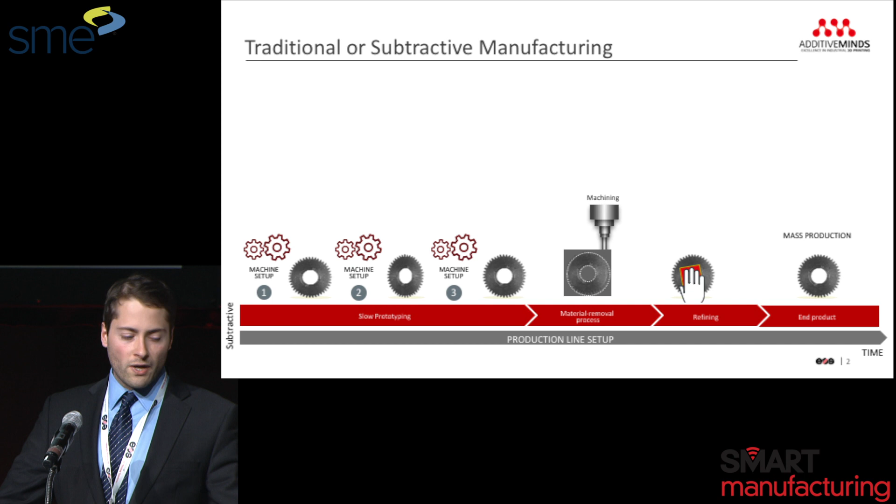So first, just a general overview. I think this is probably background for a lot of people, but traditionally, how parts are made currently in a mass manufacturing environment is a very subtractive method. So a lot of machine time, taking a block of material, machining it down, going back and fixing the dimensional tolerances and things that aren't right the first time. The prototyping and design phase take up a great amount of time and money, and that's where we see the biggest advantage of additive manufacturing: it's straight from design file to print.

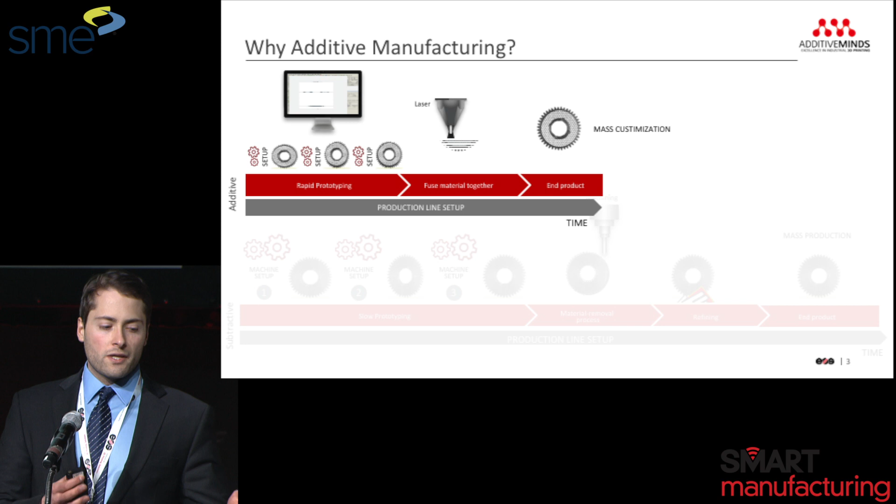This doesn't just speed up the time of producing a part, it greatly speeds up your time of reproducing a part and improving upon it. One of the biggest advantages of our technology is you design a file, you print it, and you edit it once you find out it needs changes. Traditionally, you have to wait for a machine to become available, send the part back, evaluate it, and then remachine it. So really, from conception to perfection is where we see our technology advancing others' business cases.

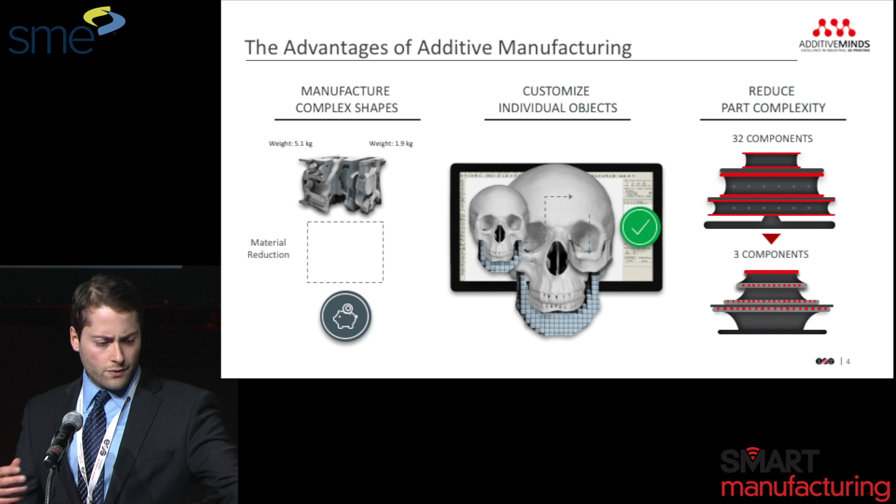Some other features we're able to leverage in our business: we're able to create complex shapes that no one else can. Imagine a part such as what's on the left—there's so many internal geometries, fine turns, sharp angles, things that we can do that you just can't do through machining or casting or anything of that nature.

We can customize individual objects. We can build 70 or 80 different parts, custom for 70 or 80 different people or applications, in one build. In that way, it's really an efficient tool at revitalizing your supply chain, freeing up a lot of machine time and personnel time. The design-to-print and custom-print capability is where we've seen a lot of success integrating into product lines and turning profits.

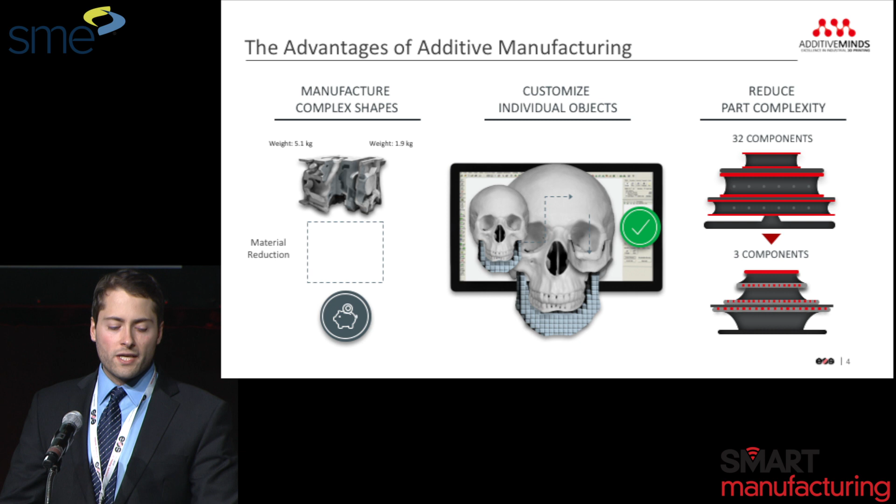Thirdly, reducing part complexity—this doesn't necessarily mean design complexity, because we do have a lot of parts that are very complex from a design standpoint. But imagine something like on the right there: a component made of 32 different parts, all put together, attached and assembled—32 parts that can be mismanufactured, 32 ways it can fail to fit together. By designing these to reduce the components, we can effectively reduce time to production, reduce complexity, and increase the success ratio of our products.

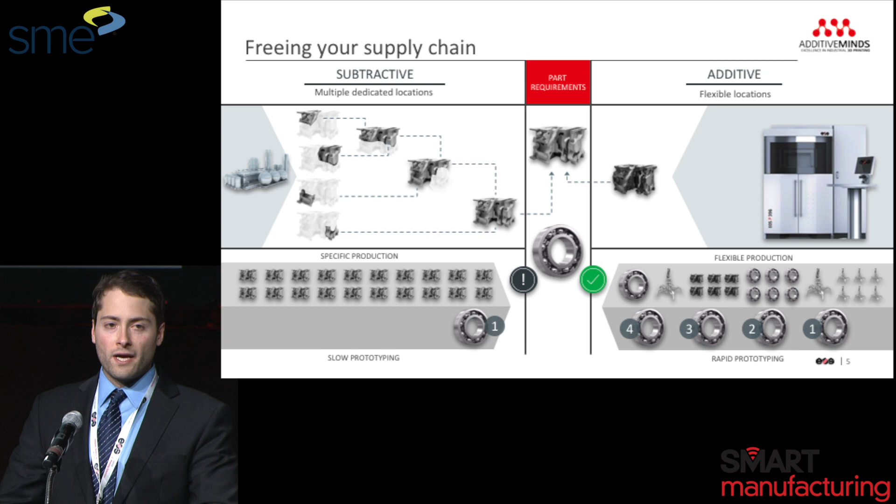Some of the case studies we've done in the past: we've shown that a typical process taking 7 or 8 machine steps across different stations in subtractive manufacturing, we can do in one print. And flexible production means we can do many different parts, as I mentioned, with very fast turnaround in the prototyping phase. We see that as being a major driver for additive manufacturing, currently and in the future.

So we see the ability to produce designs more quickly, validating your designs more quickly, and improving upon them as a major growth factor. It's a way that our customers can leverage our products to give them a competitive advantage in terms of innovation turnaround.

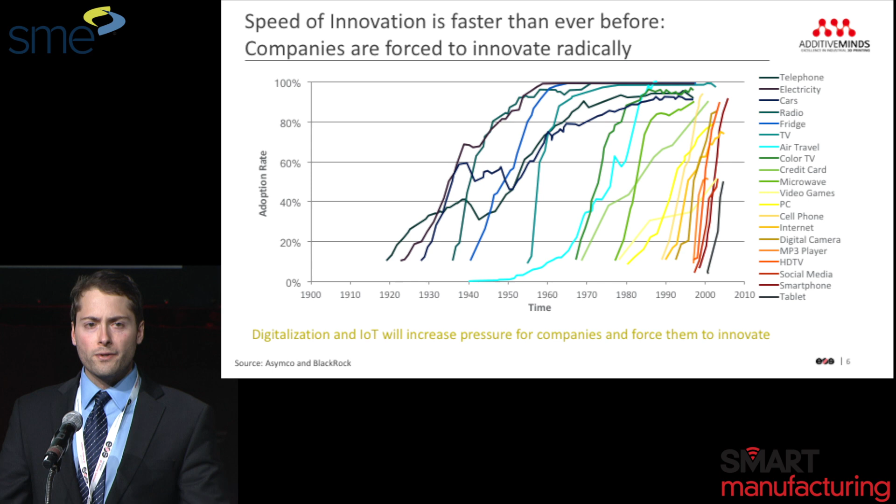I'm going to talk a little bit more about what our Additive Minds group does, but just to overview AM technology - yes, there's a lot of great technology, not just EOS technology, coming on the market, and there's a lot of great things you can do. But one of the most important things, and one of the things not being done in a lot of cases, is transforming our people to know how to leverage this technology.

So what EOS doesn't want to be is just a machine and material producer, just selling our products and never hearing from our customers. We want to help transform the people of our customer base.

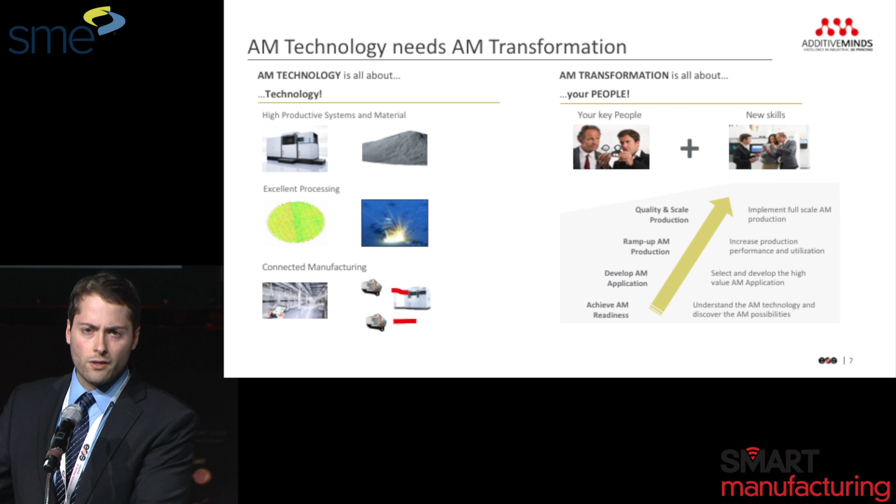We want to be involved in figuring out what parts we can leverage in your current product portfolio, what we can improve upon with our capabilities, how we teach your people to think in a way of being able to utilize this technology, and how we can grow along with you to steer our own technology for our customers.

That is really why we developed this Additive Minds group, in which I am the manager for our polymer Additive Minds. It's a consulting/engineering group where we develop applications directly with our customers, and we teach them how to use our machines on a more detailed and advanced level.

We also have tools that we can help integrate in terms of part screening, selection, and looking at your business model and leveraging our products to improve upon your business. So breaking it down, there's really kind of 3 stages of customers right now.

We see a lot of initial customers that don't have a lot of experience in additive manufacturing. So how we really get involved with them at an early stage is we build benchmark parts with them. We help them tweak their designs, their material, or their products, and we show the viability of our technology, and we train them on how to do this themselves.

Another goal we have right now is not to just be short-term suppliers, but building partnerships. We're a very customer-facing and customer-focused company looking for long-term partnerships - how do we build sustainable relationships to drive our technology forward in a global sense.

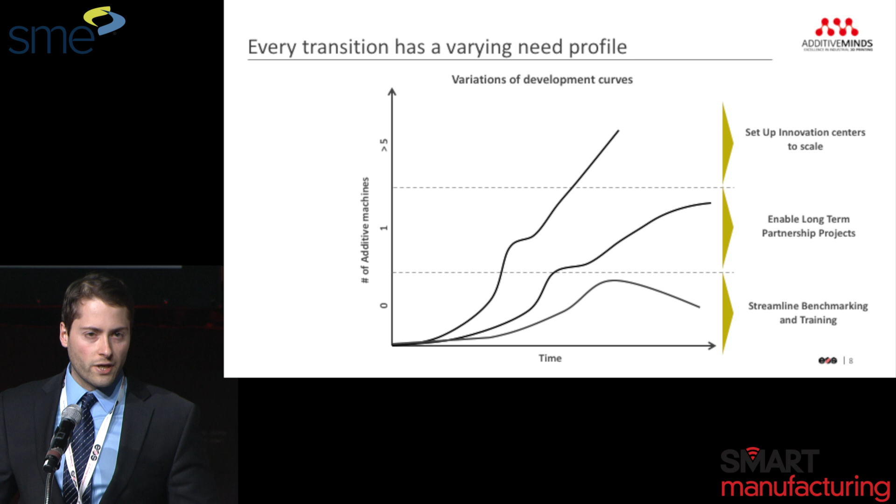We're also, with select customers, building innovation centers where we're setting up 5 to 10 machines, on site with our customers and partners, and then we're using those to rapidly revitalize their business and transform it to move into the advanced additive manufacturing phase.

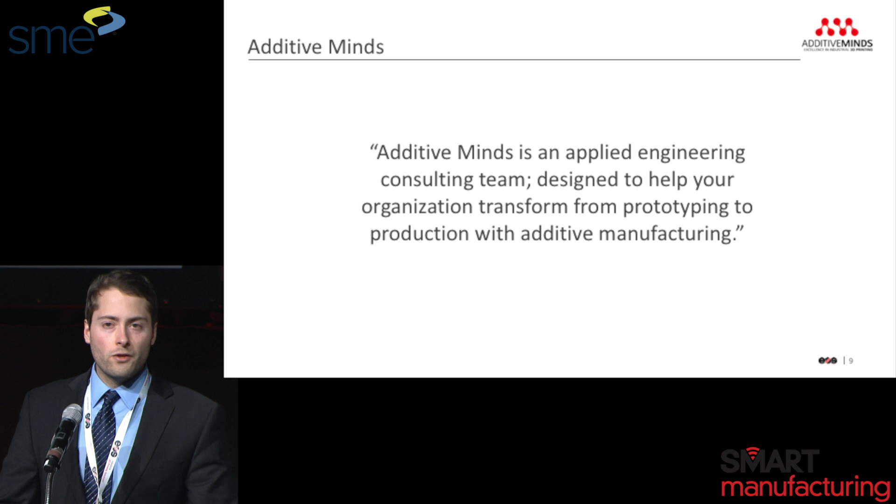So just an overview of what we do - we're a consulting team designed to help your organization transform, and it's really about us not being a supplier. It's about us being a solution provider and a partner to our customers and to those wanting to leverage our technology, and vice versa.

So what I wanted to do is just give a brief overview of each of the areas we operate in, to give you a better idea of how we engage our customers and the products we offer.

So just to talk a little bit about our training portfolio, there's a large range of general to advanced training products that we offer. Innovation with 3D printing is a module that we offer to beginning customers on what is 3D printing, what are the advantages, and the way we can utilize it in your business.

Then we offer a design for additive manufacturing course, which gets a little bit deeper into the allowables of designing an additively manufactured part - what can you do, what can't you do, and how do you design it for your specific application?

In this module, we would take a specific part file from our customer, spend a couple days with them, and redesign it to show how we can optimize it for their application. We have other consulting or training packages such as topology optimization and exposure editing.

A lot of our customers want to design their own materials and their own products, so we teach them how to leverage our machines with their own products if that's what they want to do. We really are trying to offer a diverse portfolio of trainings targeted at all levels of users, helping to grow our customers with us through this process from basic to advanced.

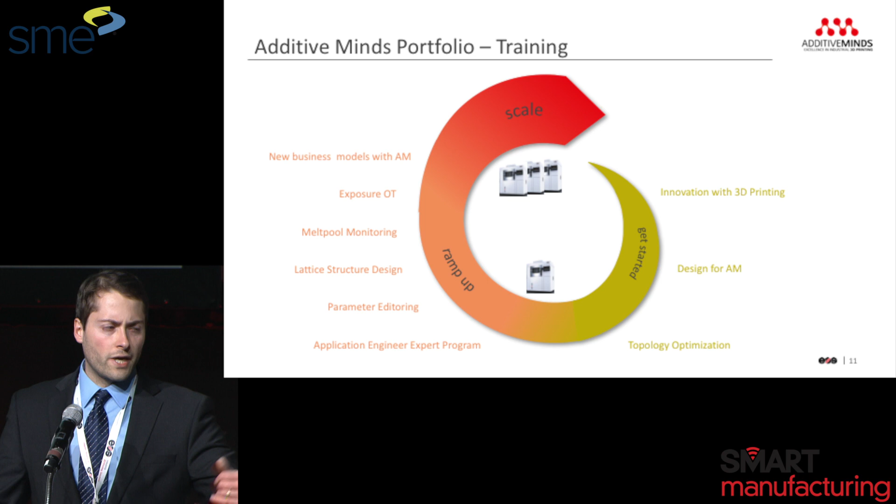So I just wanted to go into a couple of our more popular trainings that we offer.

Innovation with 3D printing really looks at two main areas: the complexity and flexibility of additive, and how we balance that in our product portfolio. We look at where complex geometries, customization, and functional integration collide to allow us to design a product that can't be produced any other way, and can help replace or improve current products.

The other way is looking at flexible production time, location, and volume. Often we find that especially our heavier manufacturing customers have one large plant in one area, and it makes it difficult to diversify their supply chain and the way they make parts. One advantage we see is that it's a machine with some equipment, and if you have a room large enough, you can put it there, and we can work with you to create these sites around the globe or at your locations. So the flexibility of your supply chain goes up greatly, and you reduce the risk of having just one large supply or production site.

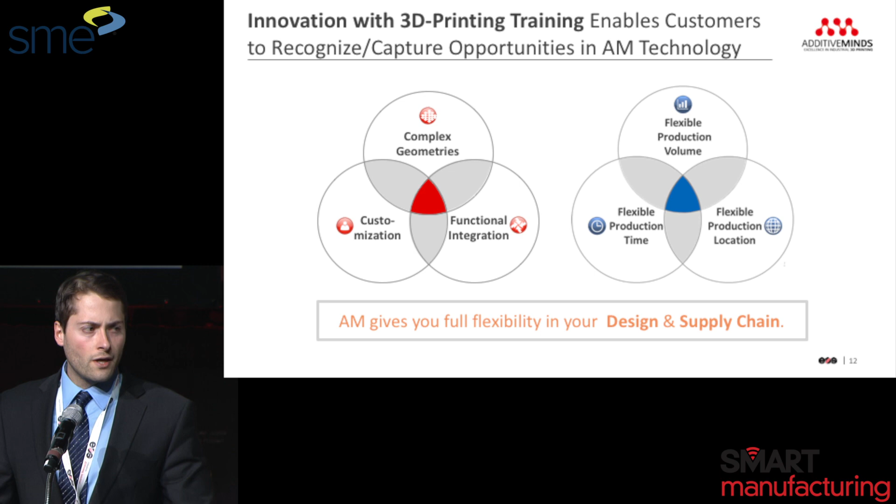Generally, how our trainings are conducted is we lead small groups custom to the needs of your people, and we do it on site at your facility or at our facility. So it's really very customized to the needs of our customers.

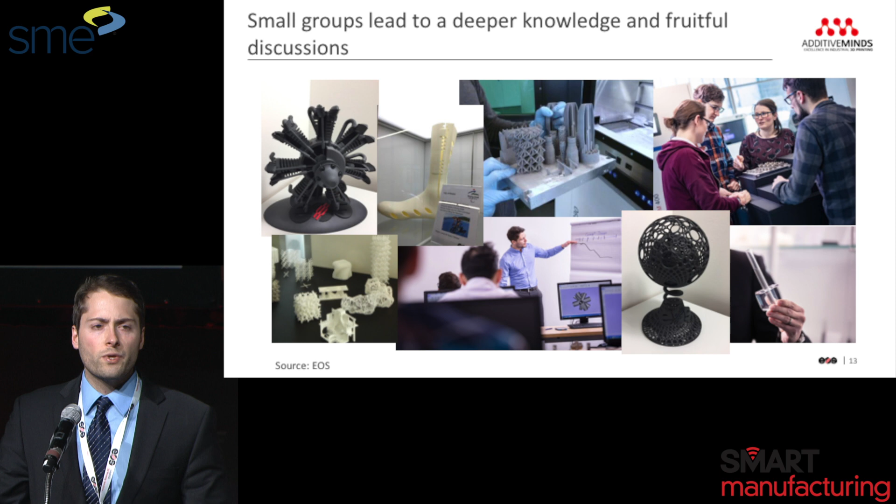If there's a machine installed at our customer site, we'll go and do the training there, or we have a showroom in large centers in Texas and Michigan where we host training events that our partners and customers can come to, and we work with them on bringing them up to speed on how best to use this technology.

So learning outcomes of this basic training is to be able to identify and understand the benefits of AM, and become a thought leader within your company. If you have a large company and you train a core few members from beginning to finish on how to utilize this technology, it can infiltrate the rest of your company, and you can use that to advance your company through our specialized trainings.

Maybe it doesn't make sense to train everyone in your company, but if you have a tight group that we can bring to our site or train on site and bring them up to expert status, we can drive your products that way too. We find that this unleashes creativity and innovation throughout our manufacturing platforms.

This is a 1 to 3 day course depending on what our customers need, and we offer it with a max of about 10 participants. This is also available in metal and polymer additive.

There are very different requirements from a design side. One easy example is our metals require support structures, and our polymer technologies don't. So you have a lot more freedom when printing a laser sintered polymer part—more design freedom and more ways to pack your parts in a build than you do with a metal machine.

We also leave our customers with all of the material that we bring, so handouts and things like that, but also the test parts and the parts that we co-developed during the process. We find that if we work through the entire process from beginning to production with our customers, they tend to retain that knowledge a lot more, having been through the whole process.

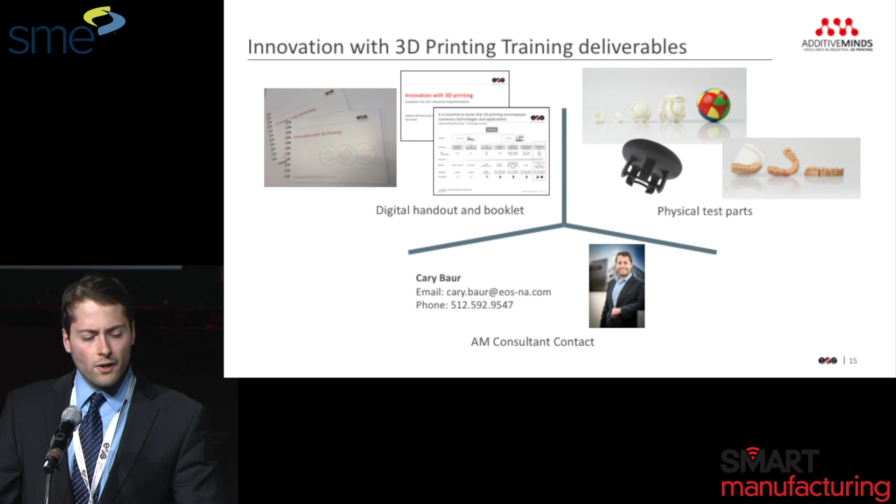The second topic I wanted to talk about is our AM design training. We have a training module specifically designed for how you design a part for an additive manufacturing technology, whether that's metal or polymer—what to avoid in terms of part orientation, surface roughness, thermal warpage, and things like that. We offer an advanced class on how to design parts and how to orient parts in your systems.

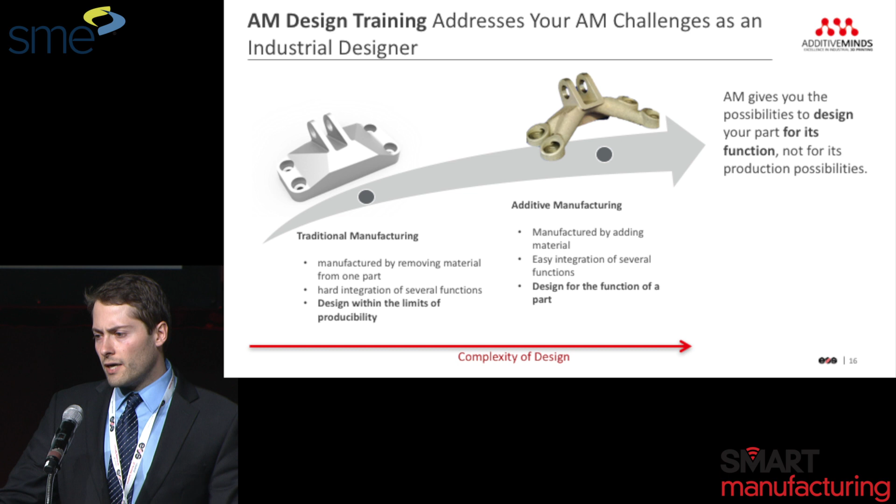This really gives you the ability to design your part for its function. It's a way to give you a tool to design specifically for your application, and teaching your people how to do this on their own.

The outcomes of this are to understand additive manufacturing compared to traditional, and learn and apply these technical guidelines. We first teach the guidelines of how you orient a part, how you design a part, and then we teach and watch our customers do that with us.

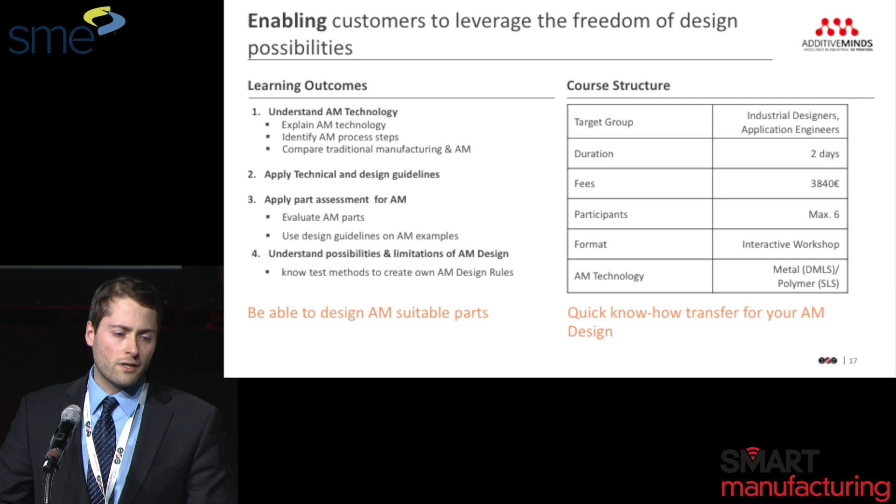This actually offers a big advantage for us too, because when you are interacting on this level in a training or consulting capacity, we're learning a lot too about your business case and what you need. That goes into our roadmap for our technology too. It's really important to be interacting with your customers at all levels, at all times, to really drive what we hope is a very customer-faced and customer-focused technology.

Similarly, design is a bit more advanced, but we'll work with you to design parts such as these. You can see the octopus at our table over there, and kind of ensure that all of the AM design guidelines are understood, and develop additive guidelines for our customers' processes also. A lot of these guidelines we develop on site when we're learning with the customer what their products are.

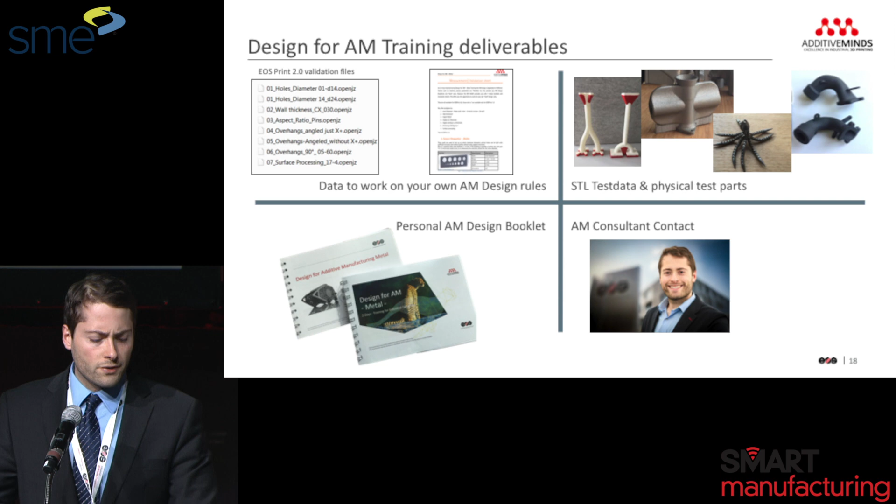So that was a little bit about our advanced training. There's a lot more to talk about there, but I didn't want to go into too much of it. So I want to jump a little bit to what we do in terms of consulting with our customers.

Our consulting group is something I think really sets us apart from other producers and machine and material producers, in that we specifically design our consulting packages around what your needs are. I'm going to go a little bit into how we teach part screening and selection for these consulting packages, but I just want to point out that we develop these specifically with our customers.

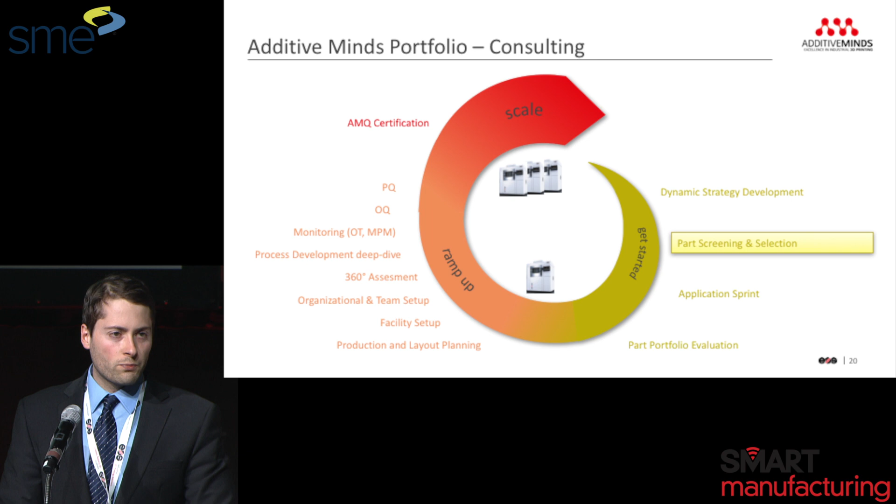These aren't really going over pre-made courses that have been the same for years and years. No, it's our experts in the room with your people for a few days, working on your real problems and working on how to advance your technology.

We find that one of the biggest challenges with dealing with our customers is, okay, they understand our technology, they understand that additive manufacturing is on the rise and all of that, general stuff, but one of the hardest questions to answer is, where do I start with my portfolio?

Maybe I'm a manufacturer that makes 500 parts. Hey, we could technically make all 500 of these parts potentially with additive, but how do you really go about deciding what makes the most sense for your business, at what to put into additive?

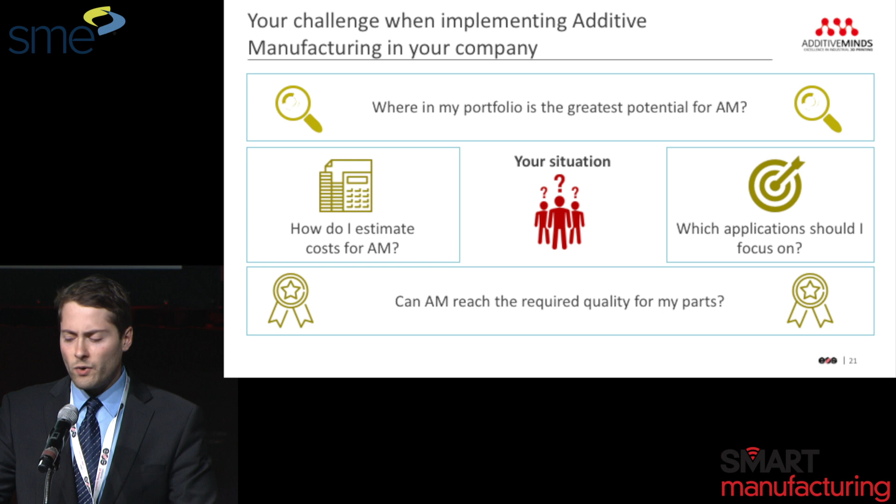So I think a lot of things come into that: how hard is it to redesign? How effectively can you redesign that? What is the cost estimate with AM? A lot of those questions can be answered by the way we design our modules, and we work with your people to go through our tools to do those calculations and do that part screening work so that we can together go forward and say, yeah, this makes sense to build, this maybe doesn't, and we'll look at it at a different time.

The way we kind of look at this is there's always an added cost to additive, designing new or bringing in new machines, new materials, things like that. It's always kind of a startup cost. So you're in a little bit of a deficit if you just look at the cost to bring that technology there. But if you break it up into ways that you can leverage that to create net value, you start to see a better picture.

Cost reduction through supply chain, freeing up your supply chain, making it more flexible, more agile, things like that. Maintenance of fewer machines compared to a traditional way of producing these things. Time reduction, again with the supply chain, prototyping, rapid development of products and new designs, and the additional value, which you could see if you look at the life cycle costs.

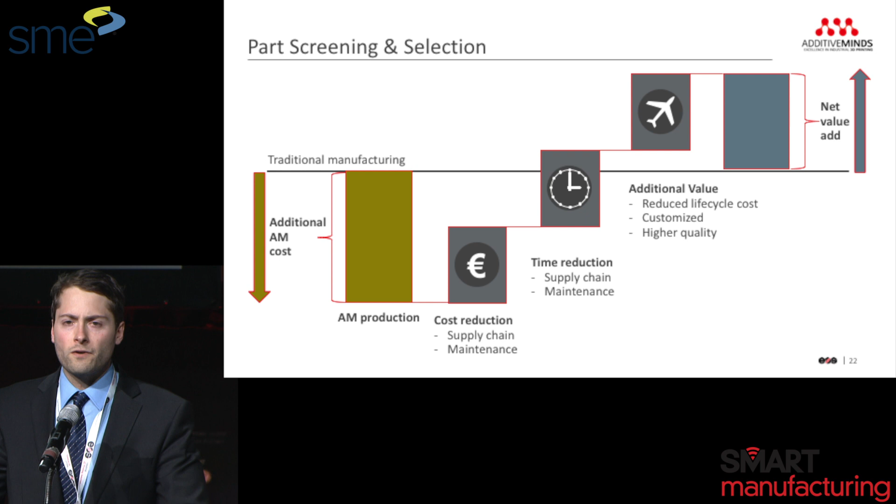If you look at the ability to go from concept to product and speed that up, that results in not only a better product, but also a much faster product with a lot more market potential and adoption. It's really a business win when you look at it, if you're able to stay ahead of the curve and go from conception to product in a very short time.

So when we're looking at part selection, going back to my other example, let's say you have 500 parts and you're looking at what you want to use this technology for. Does it make sense to bring in a new printer for building this part? The way we like to look at it is there's a quadrant box of does it technically fit within additive technology, and what is the economic fit? What are my economic advantages of using this technology, and what is the technical fit in terms of can we produce it well, can we produce it consistently, things like that.

To evaluate the technical fit of an application, we simply walk our customers through: does it fit into your current AM system or systems? Do we have the products that can help redesign and actually produce these materials and parts on our systems? Are there materials available? Do we have the right solution for you? Does it fulfill AM design rules?

Going back to our design training that I was talking about before, a lot of parts, frankly, are very basic parts that don't need additive manufacturing. So it's also a thing of being smart. We don't think we're going to solve the whole world's manufacturing problems, or that we're going to take 100% of everyone's manufacturing. We want to be in that niche area that drives value for our customers.

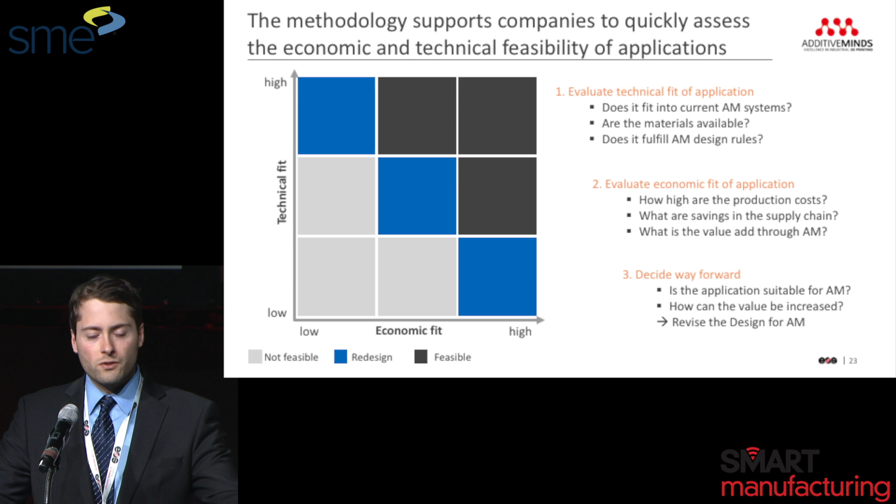This is a tool we like to use when we're looking at new designs and new products, that keeps us focused on not just using additive for the sake of using additive, a technology we've heard a lot about and people seem to be adopting, but how we can sit down and look through our products methodically and think: here's how we can partner with EOS, here's how EOS can partner with you, and use these tools to determine together whether it makes sense for your product line to adopt this technology.

During these types of workshops, which we like to hold at our customers' sites or at our own sites with training facilities, it's very interactive. We have specialized consultants, either metal, polymer, or design consultants, who can brainstorm interactively with your engineers and people to say, okay, yeah, this makes sense, or no, it doesn't make sense. That interactive discussion leads to a fruitful result where we not only determine what parts make sense, but build knowledge of the methodology of how to look at this from both points of view, yours and ours, looking at it from a realistic manufacturing view and also from an additive cost and capability viewpoint.

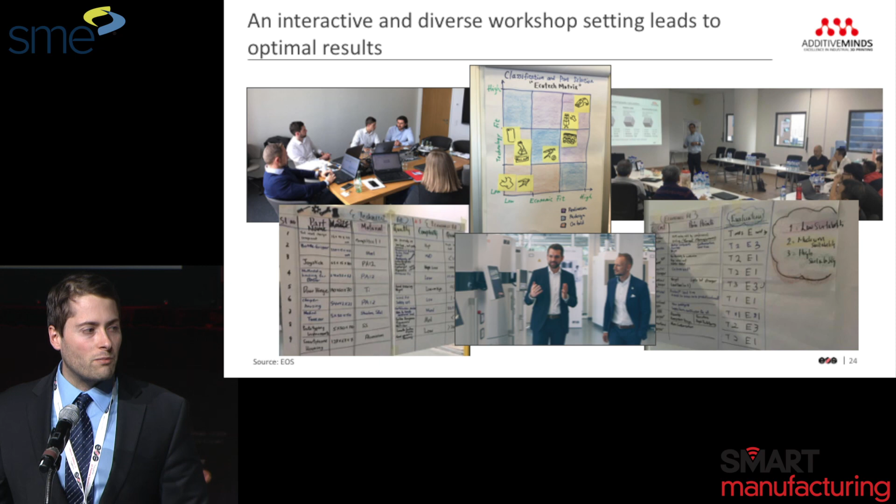So the desired learning outcomes of this are to understand the possibilities and limitations of AM, once we work with your folks to make sure that the technology fundamentals are understood.

We look at case studies from industries, things from our past where we've said, okay, the part you're looking at, we've done something similar before. It could have worked out, but the costs weren't right because it took too long for a certain reason. We can look through that and work with you on it.

And we teach the part screening methodology. This is something we want you to walk away knowing, that your people have a knowledge of how to do this and how to utilize the tools we've developed. And we're always on hand with our customers to help solve these problems together.

I think the next step is applying these methodologies to your portfolio, evaluating the design and redesign, and integrating into your product line. It starts with understanding the technology, understanding your portfolio and how to drive that forward with EOS technology, and understanding how to redesign specifically for this production method.

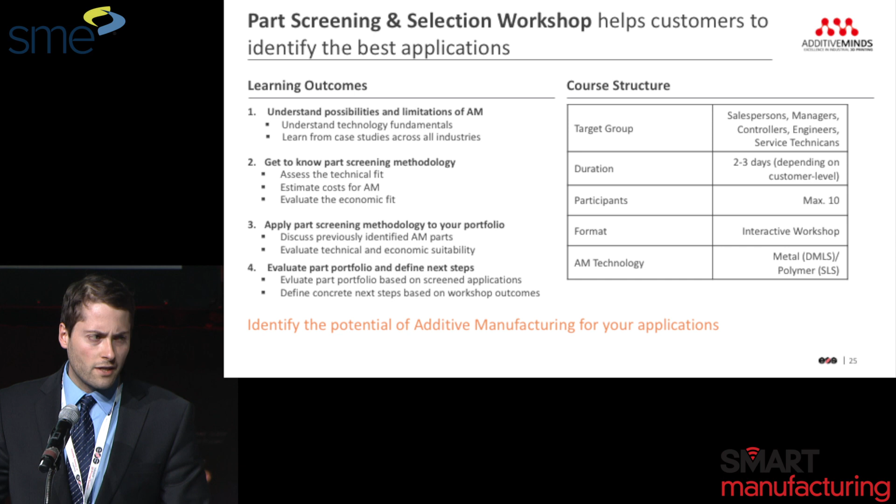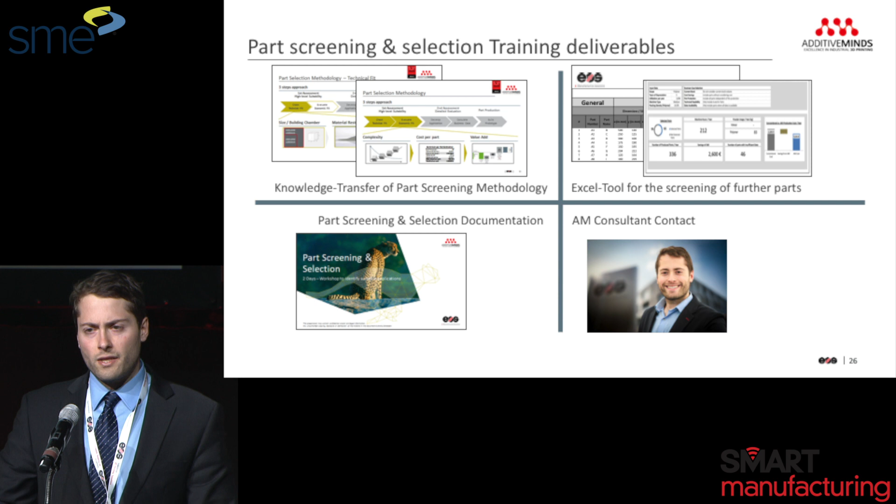So again, going over the deliverables, we have tools that we give to our customers: cost calculation, screening detail tools, tools that help you understand the difficulties and advantages of using this technology. The last point I want to touch on is innovation centers.

Just want to go over a couple we've set up with our partners. In Germany right now, we've brought Audi through this process of introducing the concept of additive, teaching them how to use additive, consulting with them on what products they can use to customize, to make it make sense economically for additive manufacturing.

Their objectives in coming to us were to move prototyping to industrial application, integrate additive capabilities with tool development and tool making, really driving customer-focused custom parts. They were looking at production of inserts for die casting molds.

One of their projects involved dashboard components, how a user might want to put his name on his car dashboard. We can use our tools to produce a die that allows them to customize parts of their dashboard and things like this.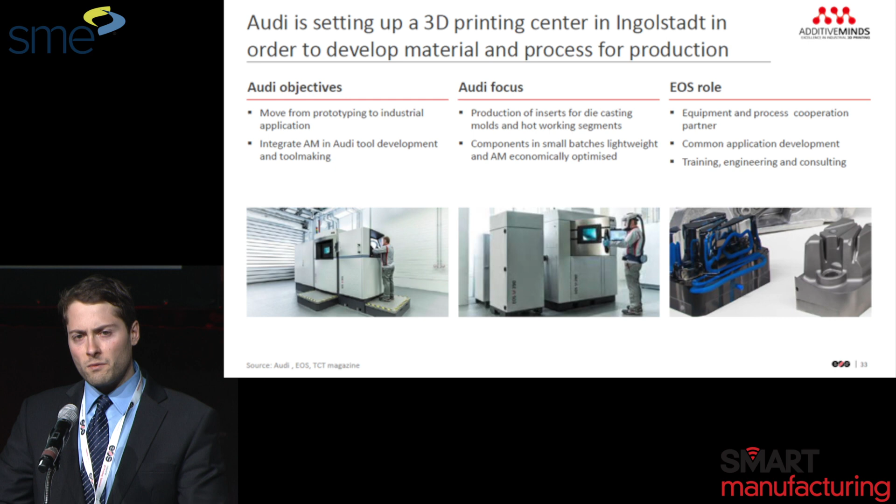Our role in this is supplying the equipment and process, of course, but also teaching them, training them, consulting with them on here's what we can offer, here's how it fits into your portfolio, here's how it doesn't, here's the economics of our materials, our machines, upkeep, all of that, and driving that together with them.

I show this example because it's an ideal example for us of leveraging our Additive Minds team to not just sell a typical customer a machine or a material, but a joint learning and joint partnership where we've learned a lot from this and they've grown a lot too. This is a really fruitful relationship that is continuing to advance both of our business cases as we move forward.

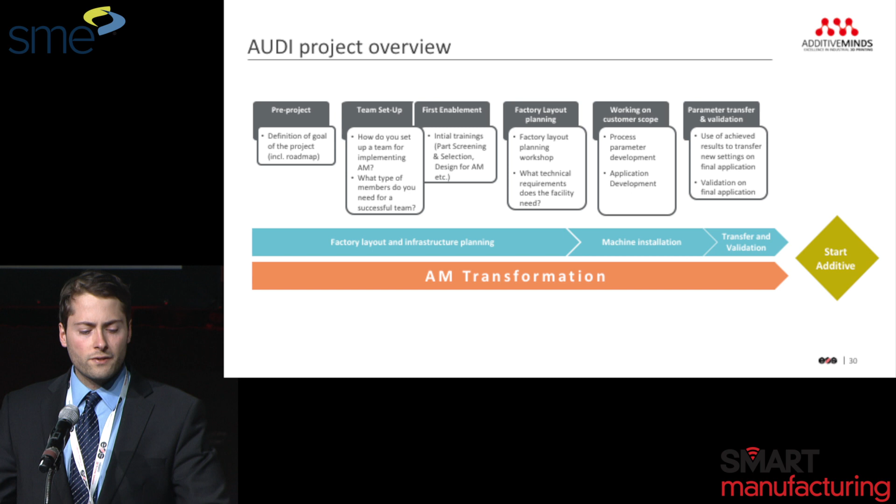We've set this up from pre-project, we've set up the teams first for enablement. We're now in the factory layout planning and working on customer scope projects, and we're driving this forward together as partners, through our Additive Minds group.

The last slide I have is UDRI, also another partner of ours that we've set up an innovation center with. Their goals were really more on building parts that are certified for certain processes.

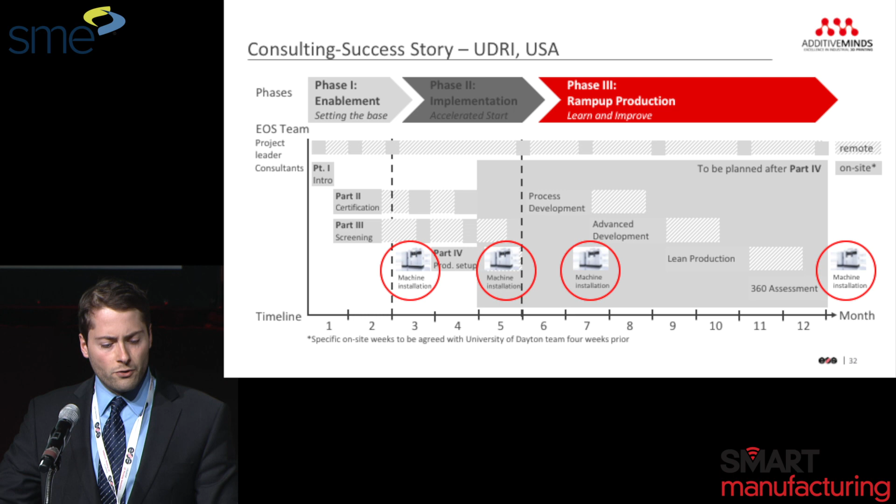We went along the same kind of development path: installing our machines, teaching them how to certify our machines, how to do part screening and selection, supplying our machines with them, all the way through machine installation. So this is just a summary slide.

At Additive Minds, as I mentioned, we are the consulting and application engineering group in Additive. We're at the midsection of engineering and customer consulting and partnership building.